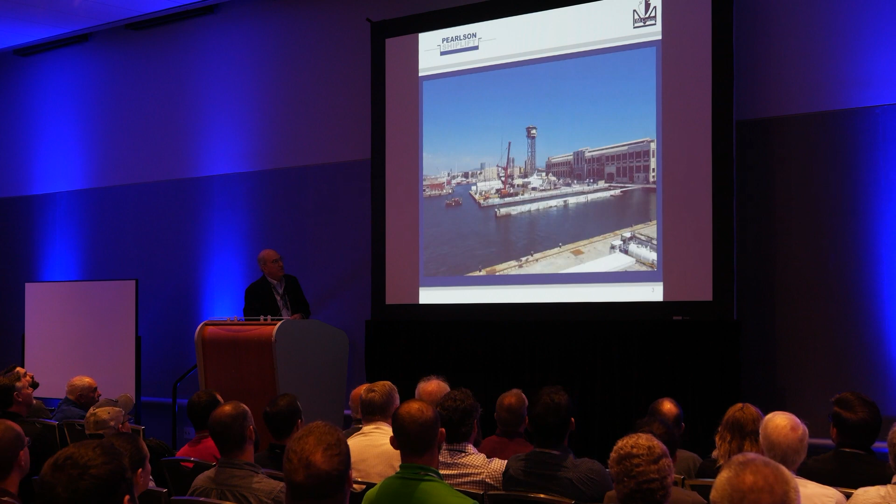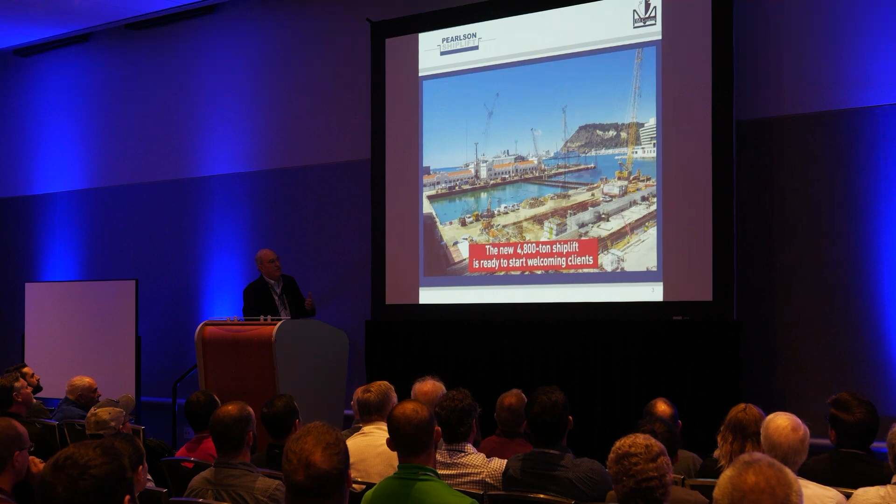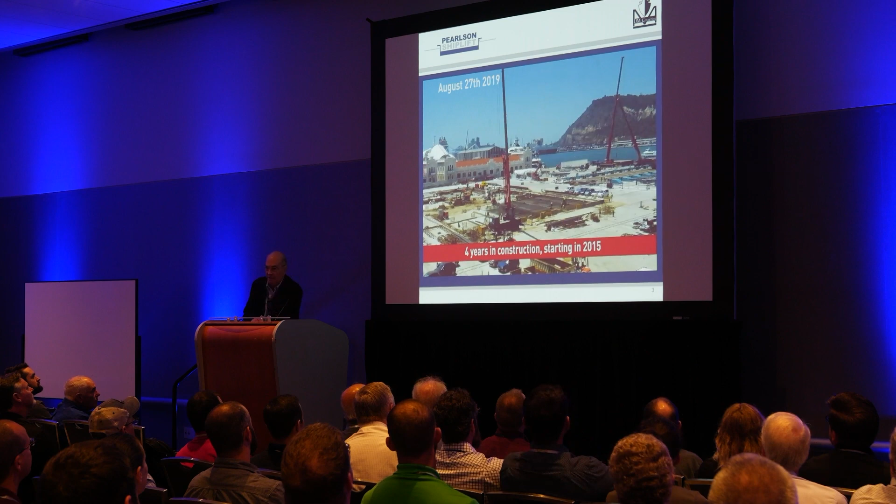Good. This facility took about 4 years to build, which one of the slides will tell you, and it basically was in a reclaimed site that used to house the paint shed at the Barcelona yard. This shipyard has an existing shiplift that was built and maintained, surveyed, and assessed by us, which you'll see in some of these pictures, but all of these images really show the entire process of reclaiming the land, putting in the foundations for the hoists, and then as soon as the shiplift itself was commissioned, putting it in operation even while they completed the construction of the rest of the yard.

Part of the interesting foundation issues here is a lot of what you see is actually on piles above the water. They did not put in a bulkhead and backfill the entire yard, only the back side of it, to transition to the existing yard.

This was during the testing and initial docking process. From a dockmaster's perspective, what you'll notice in the next vessel that comes in is that they allowed the ship's crew to bring the vessel in and tie it off before the docking crew took over.

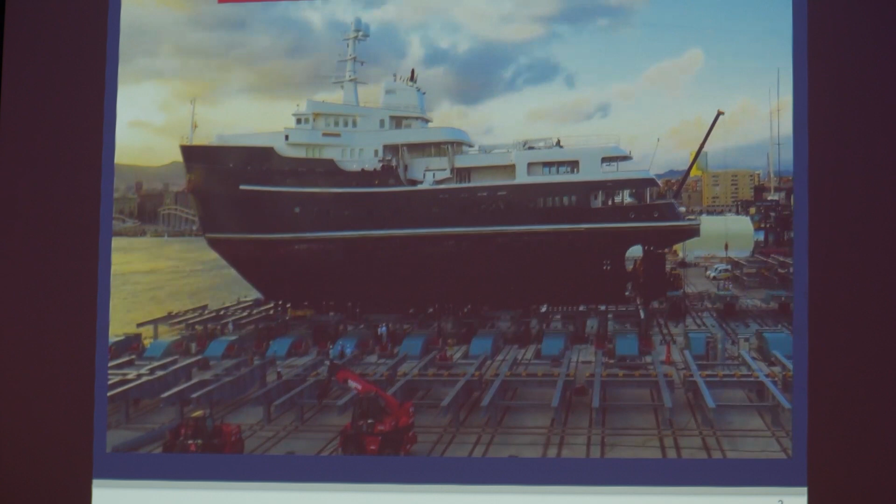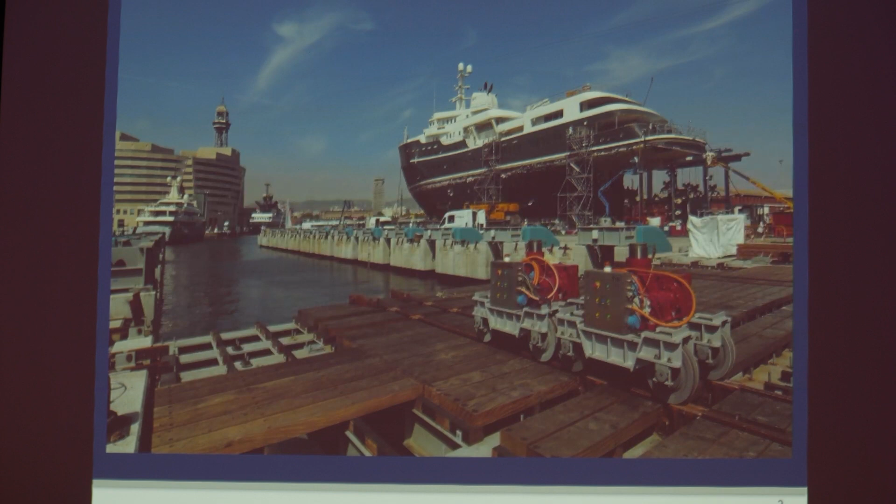That platform is actually moving at about 9 inches a minute vertically, and then once the vessels are transferred ashore, they can be basically placed in a repair berth first. Now watch this, because I've never seen this before, and I was actually at the site that day.

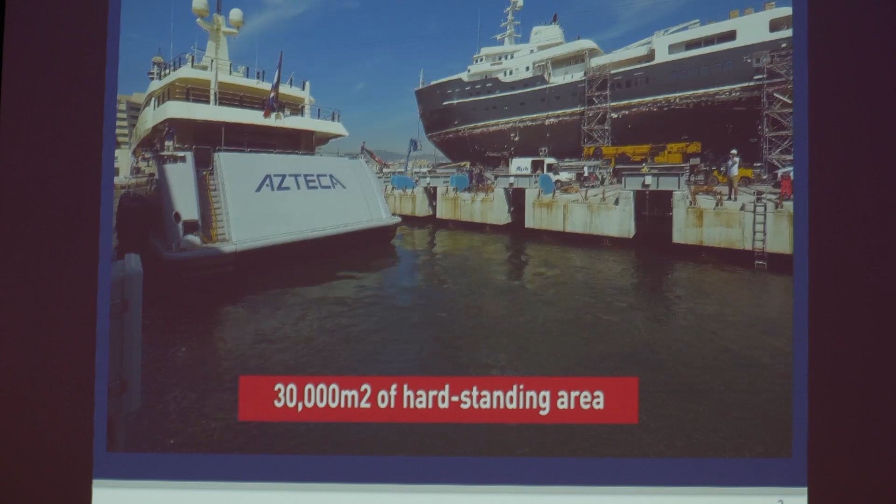The captain basically says, I'm coming back far enough, sort of the cardinal sin of energizing your props to stop before you come into the slip. That would give me heart failure if I was the dockmaster.

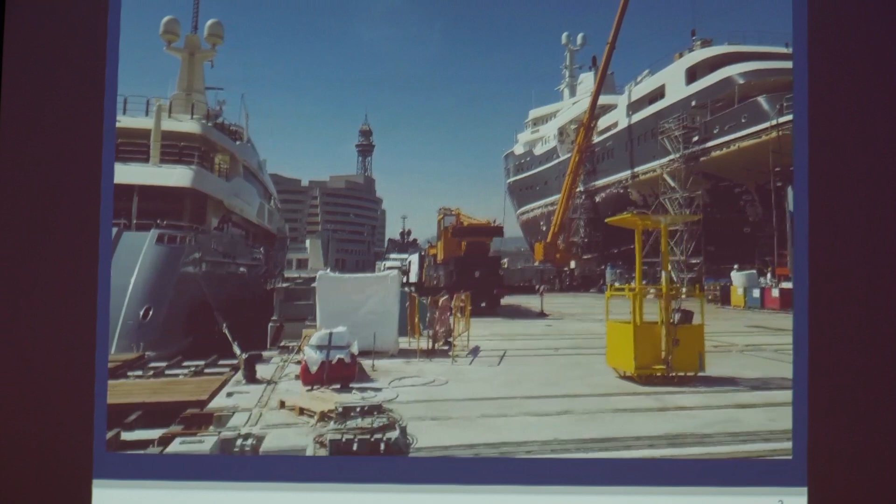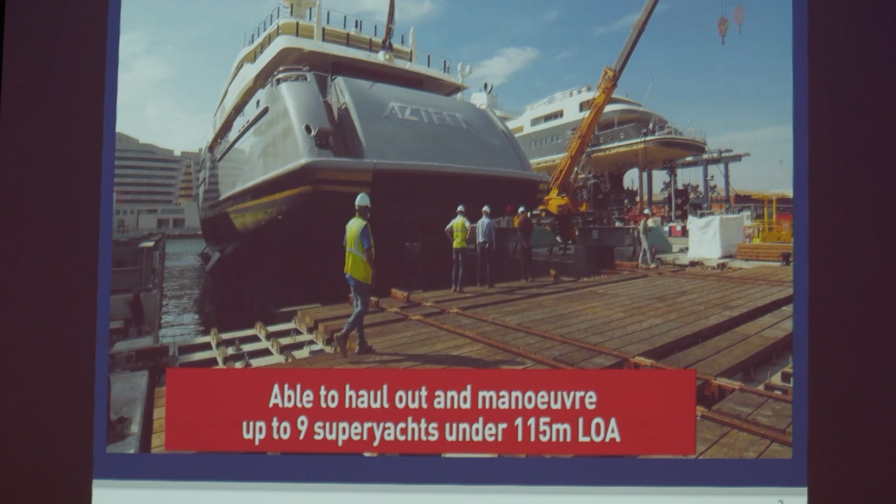What's unusual about this installation is not only does it lift the vessels vertically and launch them, but you can transfer over the top of the hoists. So direct side transfer gives them a lot of space flexibility in where they're going to place vessels and get them back into the water.

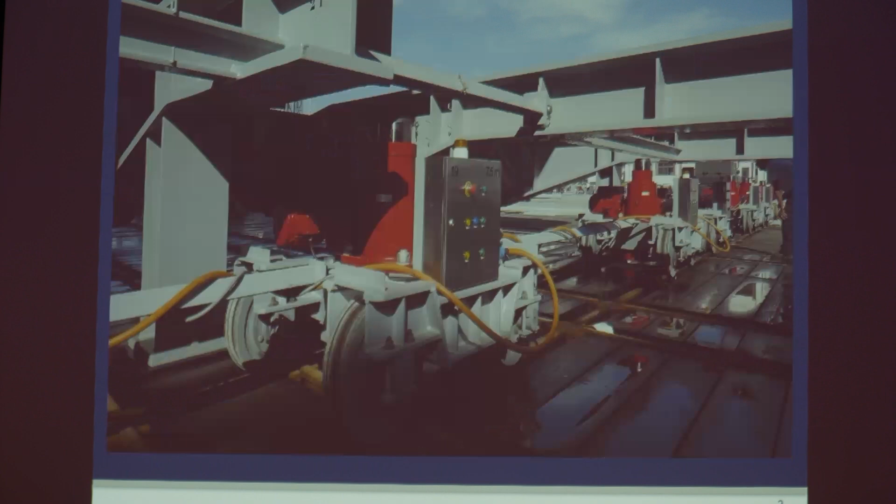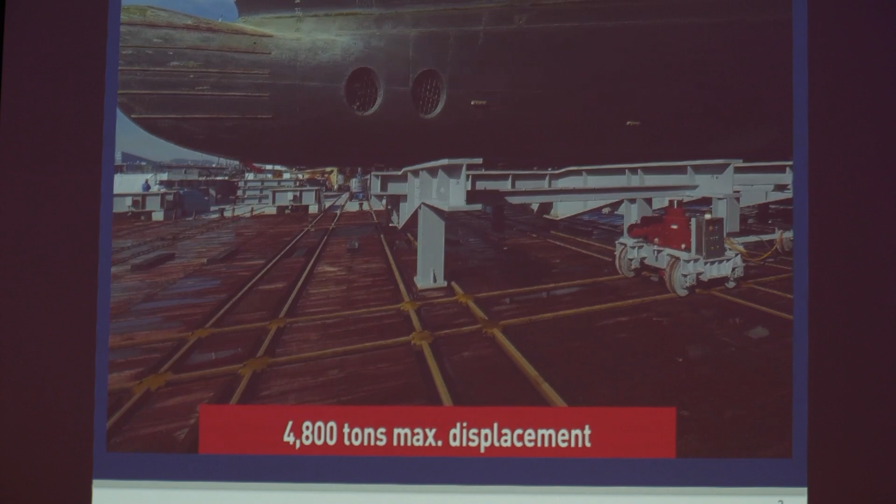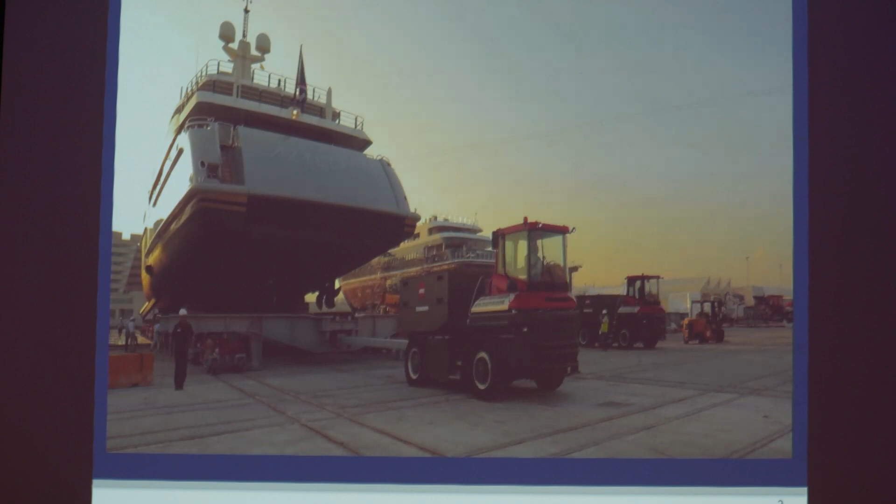The transfer system, which we'll talk about in more detail on the upcoming slides, is an electro-hydraulic jacking system. Each one is 160 metric tons. The strongbacks are pretty conventional, you're used to seeing those in all kinds of different transfer systems. They're brought into the yard on these jacks by what is really just an oversized aircraft mover.

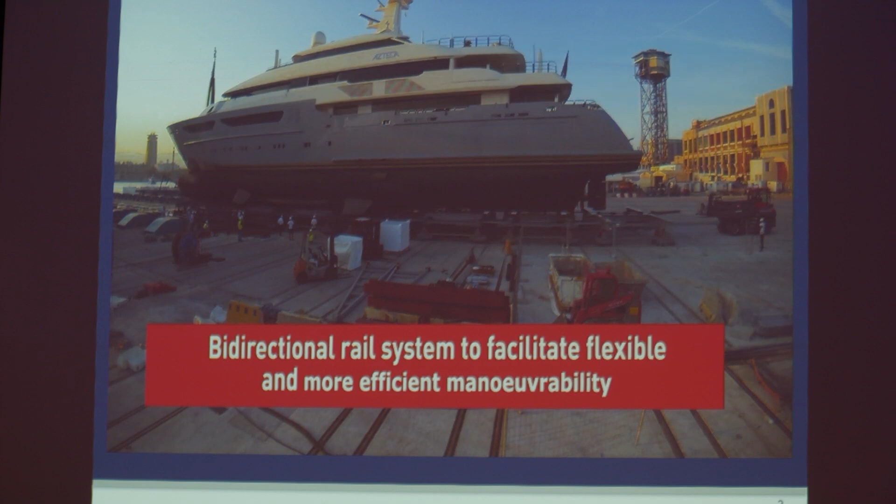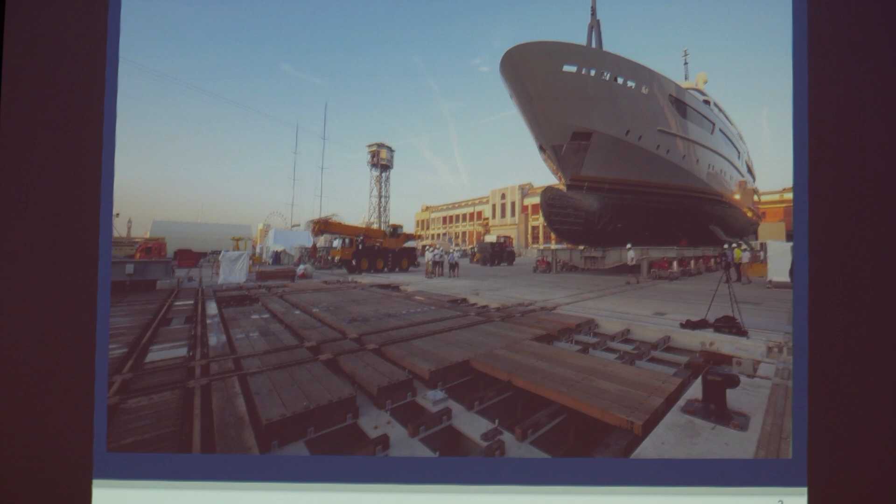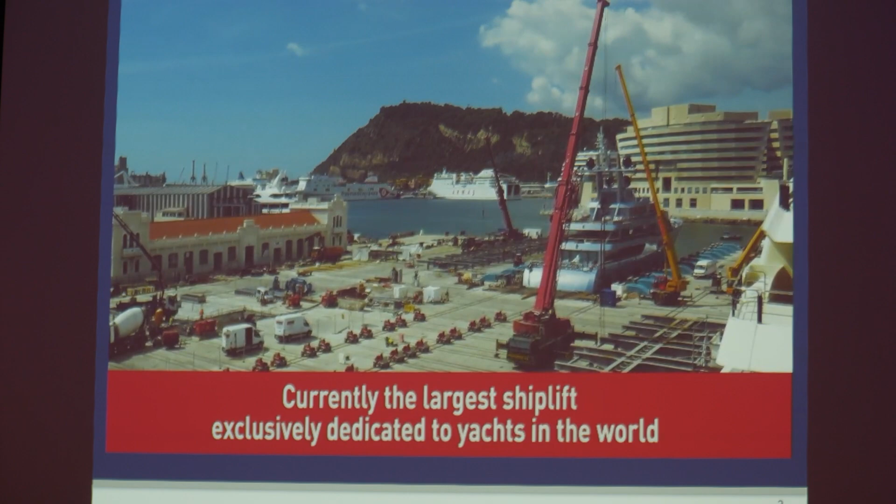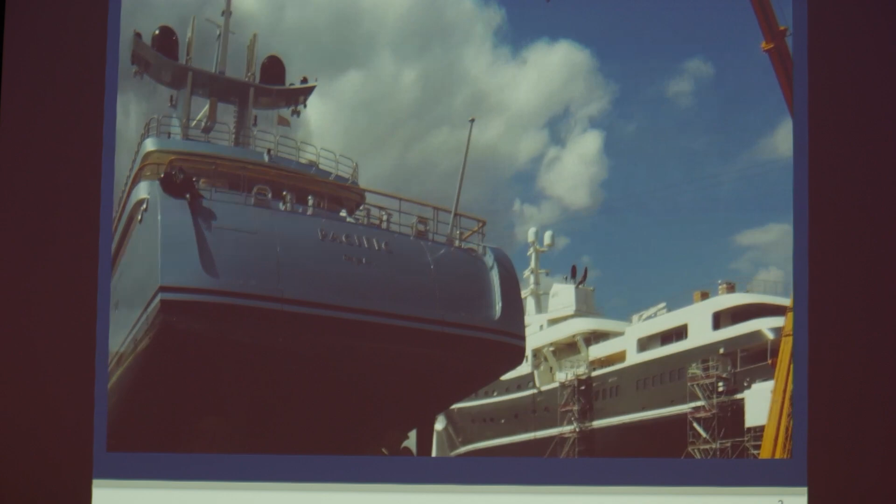This yard was very space constrained, so we were basically instructed to use every square meter to place mega yachts on, as that's their core business. You might see as many as 9 vessels up in the yard, leveraging the investment they made off of the one shiplift with its associated bogie-supported transfer system.

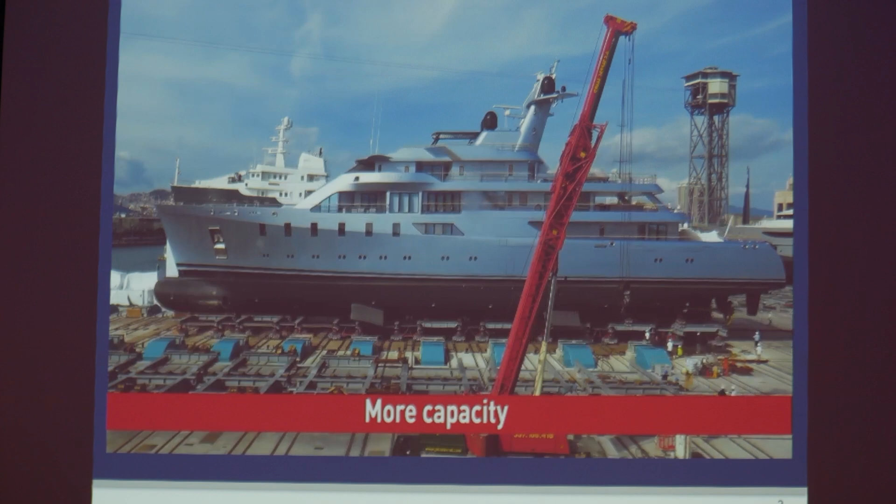On a wheeled transfer system, it usually takes 1.5% of the load being transferred to move it. That's what the drawbar pull would be expected.

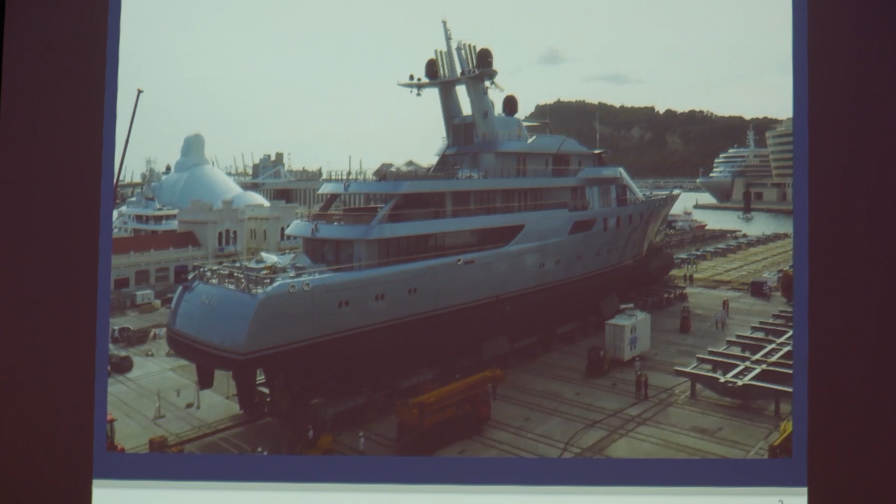So that's where we're going. At the end of this presentation, we'll see some of the elements that were required to actually get to that point in time where you can effectively leverage the capital investment of one dry dock with really as many shore berths as possible. Not photographed today is a lift that we built in Dubai that had 40 repair berths.

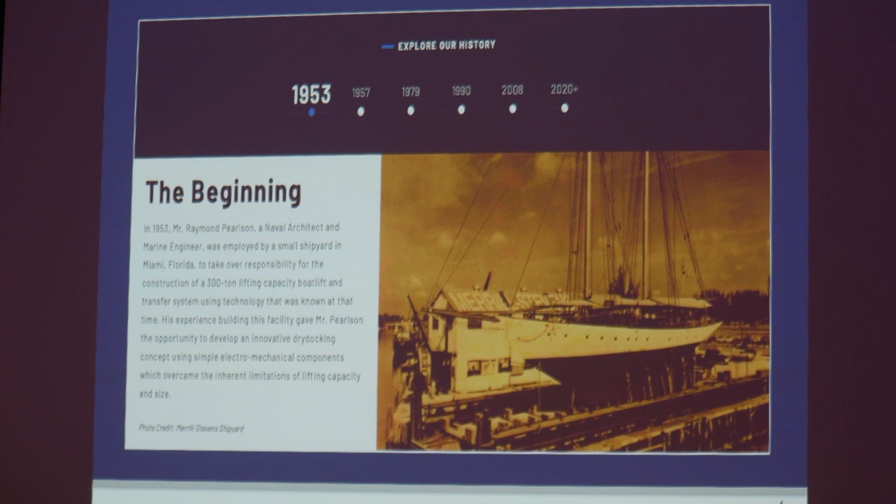We were basically told that the ruler wanted to take care of all of the dhows and all of the more modern craft in one facility, so we put in a shiplift and an onshore transfer system that had 40 berths. They then came and said, well, we have bigger boats now.

So then we put in a second shiplift parallel to the first, much larger, but tied the two transfer systems in together. You just had to remember not to try to launch the vessels docked on the big shiplift on the little shiplift.

My father, who actually invented the modern shiplift, really started out as a young naval architect trying to find a way to feed the family in Miami, and approached a shipyard in Miami and basically said, would you like to build some boats? I can be a naval architect for you.

20-something, 3 kids. The owner said to him, I don't build ships, I repair ships. I don't really need you, but if you want to project manage this new shiplift that we're building, I've got most of the designs done, not all of them. Can you take command of the design and actually complete the project and build this lift?

20-something, 3 kids, no job. Certainly, sir, I can do anything. So he took the job in Miami, and he built this lift, which is at the Merrill Stevens Yard on the Miami River.

This lift was actually dedicated about 1953, and it was built on the principle of a rigid platform with 13 cables of different lengths being supported and pulled up by 2 drums and a worm gear gearbox and a prime mover under the ground. It had 1 transfer berth ashore.

Just for reference, it took till '63, even though it was really invented back in '58, '57, for the patents to be awarded. And there are some subsequent patents we'll talk about in a minute that actually add flotation to the shiplift platform for the purpose of offsetting the weight of the platform itself.

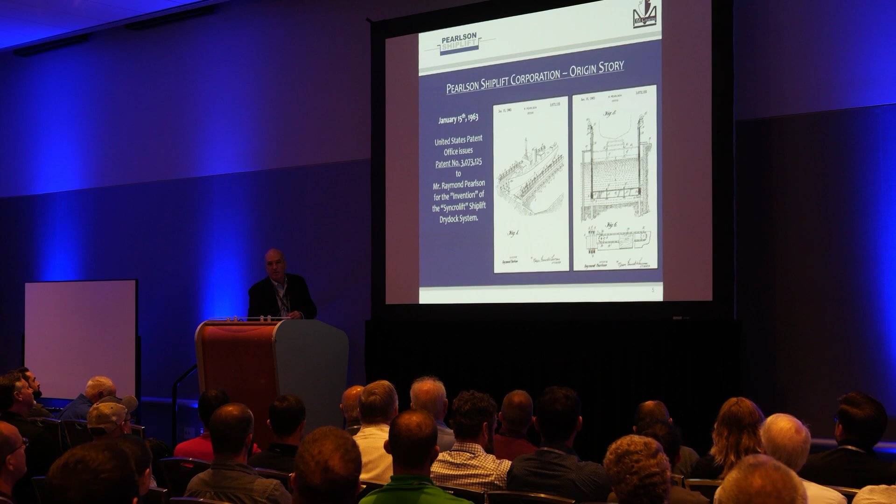So you can picture when you have a very wide shiplift, you're spending a whole lot of energy lifting the platform steel, the girders that go between the hoists. Well, if you can put flotation on the platform, not more than the weight of the platform itself, you can basically offset that dead weight and use the hoist only to lift the ship. So now you can grow the width of these platforms significantly without the burden of having to lift 20-25% of the capacity of the hoists, which would effectively be the weight of the platform.

So again, this is the first lift at Bertram's Yard up the river. And it has since been removed, and they have condominiums or something going into that site, as we see so many maritime sites being gentrified and turned into housing opportunities, which has been a real problem in Miami, as it has been in other port cities.

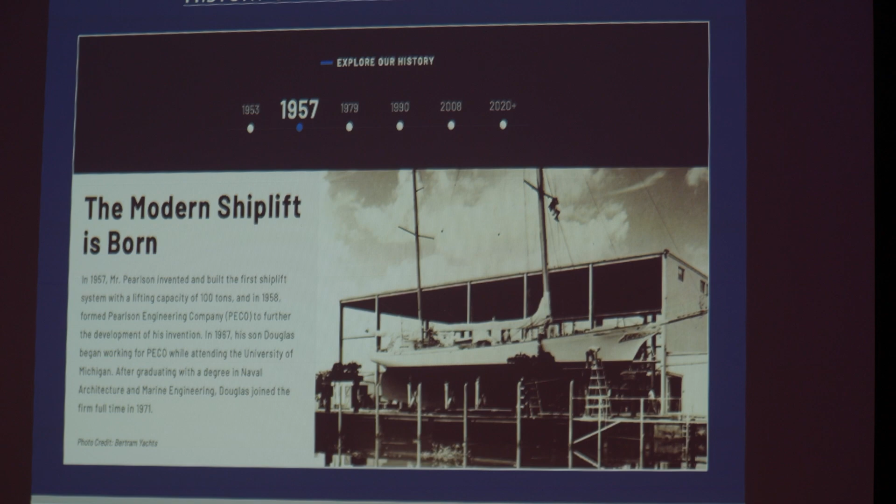So that brings us up to today, or Pearson Shiplift. This slide, which you can download, really covers part of the journey of how I got from president of Pearson Engineering, president of Syncrolift, to the founder of Pearson Shiplift.

In the middle, we basically started building a couple of facilities for nuclear submarines in the UK. To do that, we got acquired by a UK company called Northern Engineering Industries. And they asked me to join their board and maintain my position as president of Pearson Engineering.

So during that part of the journey, we continued to build shiplift systems under the brand of NEI Syncrolift. And then about 10 years later, NEI was gobbled up by Rolls-Royce as part of their acquisition of energy assets, facilities, because they had a number of companies in their group that were of interest to Rolls-Royce. The shiplift system wasn't.

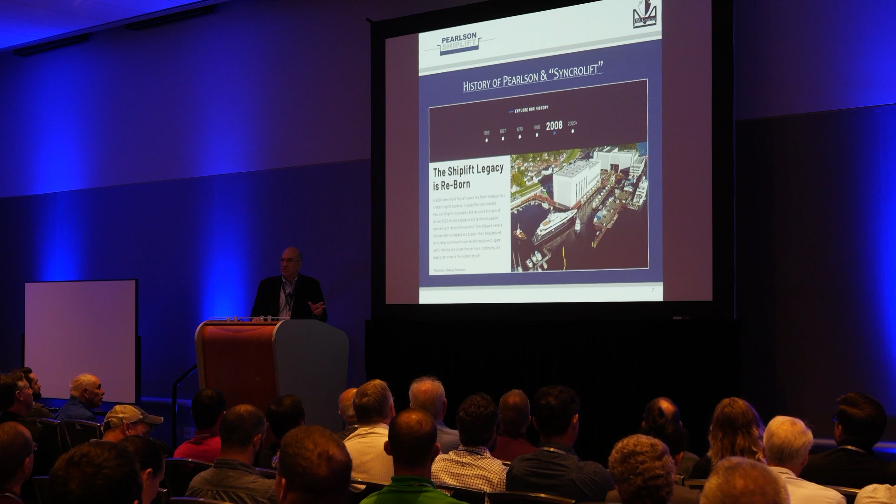Basically I went out and started consulting in building shipyards under the brand Pearlson and Pearlson, and we're still doing that today as an associated firm that actually goes in way before a dry dock is chosen and assesses what needs to be used as a dry dock, how should the yard be developed, what are the sizes and capacities of the vessels, and so on.

So I started getting calls from our customers that asked if we could come in and basically service, maintain, or expand their existing facilities. So out of that opportunity became the catalyst for forming Pearlson Shiplift Corporation, and we built the first lift, which you'll see on our website, in Germany, when actually we extended a lift that I built in the 70s by adding a pair of hoists, and then a couple of years later adding another pair of hoists, because they started building yachts that were too big for their lift.

So we were given a relatively short fuse, and during that time period we manufactured new hoists, installed them, commissioned them, and so on. The Syncrolift, the shiplift, is a tool that's a solution to how do I get that ship safely out of the water. Nobody wants to buy a dry dock, they don't want to buy a shiplift. They want to effectively move a vessel from the water to the shipyard, either to repair it, or if they're building one, launch it safely. That's the mission.

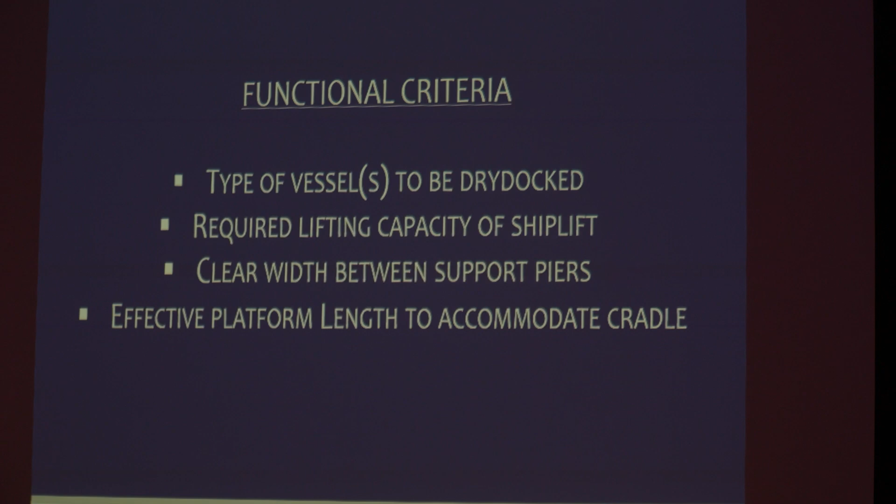This list I won't spend a lot of time on because it's common sense - what do you need to assess? The most important thing is really the width, whether it's between the wing walls, between the walls of a graving dock. What is the maximum beam that you can handle?

The shiplift, which is an articulated structure, is modular. So you can add sections as you need to lengthen it. If you want to increase its capacity, you can put hoists in between other hoists. If you want to do a combination of the two and make it wider, you can put an auxiliary pier in, get that built, and then move one set of hoists over and put in a wider platform in the middle. It's much more complicated, but a number of you in this room may have experienced that. Again, it's a very flexible asset that lets you expand it as your requirements come in.

So what has really transformed this entire process of dry docking with shiplift systems, as opposed to conventional dry docks, is this upland opportunity - what waterfront is available, what upland is available. And at the end of the day, how am I going to get onto the shiplift platform? If possible you always want to come in the end of the platform - it gives you lots of flexibility, significantly lower costs for what you're building. But Barcelona didn't have the space, so you then pay that penalty in cost and complexity, and you transfer the vessel right over the top of the hoist.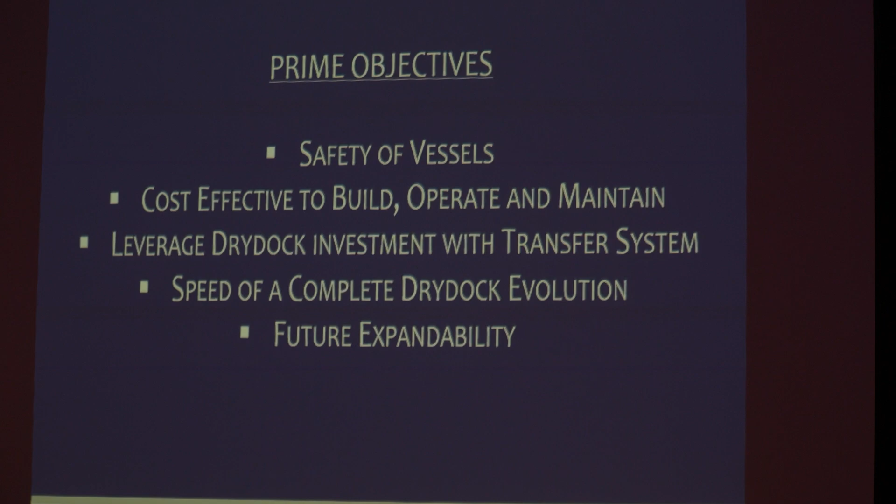So these are two classic facilities that were built in a time when land was available, and you just don't see that today. So you see very few of these two-level transfer systems. Nothing is more effective than a two-level transfer system because you never take the wheels off the cradles and you never take the wheels off the carriage. Less than half a dozen people can move one of those vessels from the dry dock itself.

The ship lift here, and after it's clear and ready for transfer, you hook it up to whatever conventional vehicle is available, bring it over the top of the carriage, transfer it sideways. Usually there's a winch in that pit, and then park it back in its repair berth. They may handle 400 to 450 vessels a year at that installation in Las Palmas.

This installation shows basically the existing installation that has a two-level transfer system in Barcelona. So the new facility is basically on the other side of the yard out of this picture, you'll see it in a minute. But here again is the ship lift, the transfer carriage, move it sideways and park it into its repair berths.

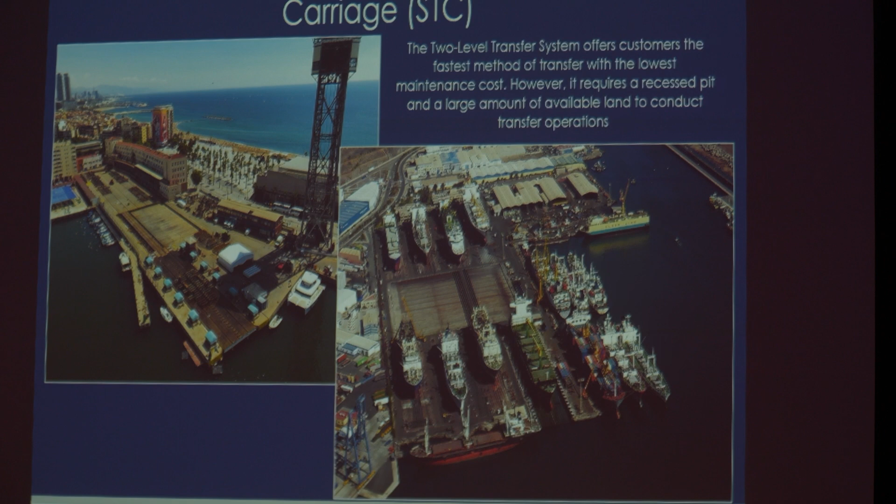Some details of the side transfer carriage where you can see you've got the rails on top of a wheeled carriage that moves perpendicular usually, but not always. Sometimes it rotates, sometimes it moves at an angle, depends what the land area is.

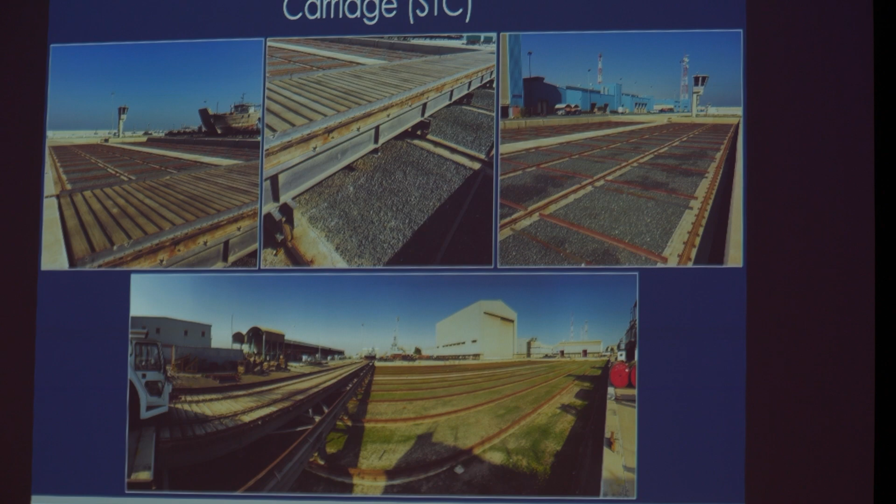All right, single level transfer systems. This is an installation in, let's see, that's Savannah, Georgia. And basically, they had an existing dry dock facility that was in a building. It was a Crandall Railway.

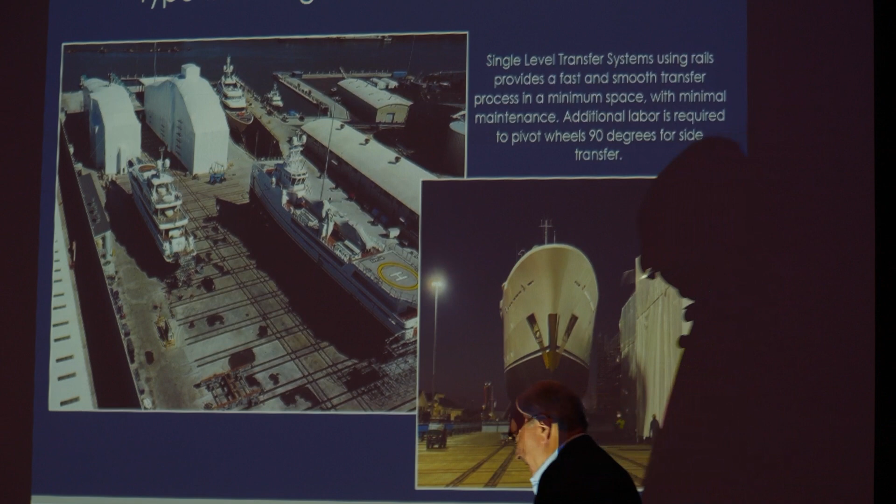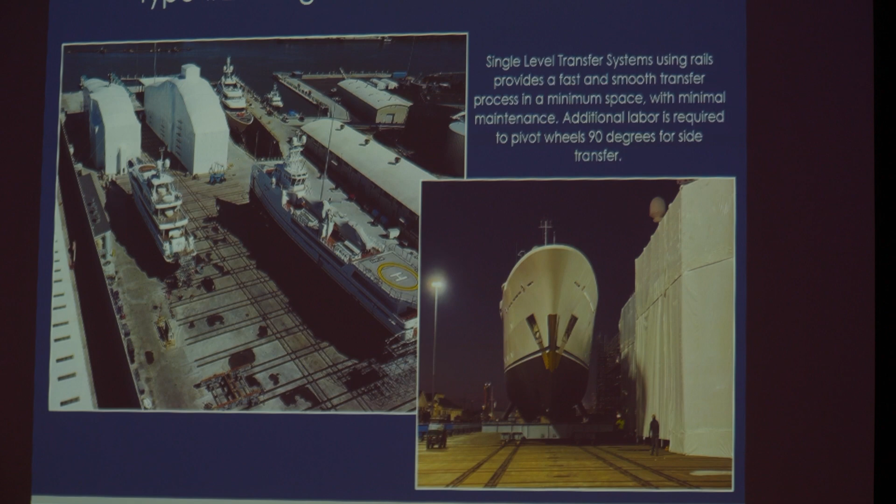Now, this is a little unusual because you see in the strongback itself, it basically goes all the way down the line of the ship lift itself, and then the wheels are actually turned in the cradles. So again, there are many different types of transfer systems and solutions depending on what you want to accomplish. In this one, they had side transfer, but at the end of the day, they did not want to go through the expense of hydraulics or lifting these bogies, so they put wheels on all of the cradles and move them sideways, and then they turn the wheels 90 degrees and move them across into their repair position.

Similar facility, and it's actually almost an identical ship lift. A minute ago, I talked about the first Merrill Stevens lift. It operated for 63 years, lifting yachts until the owners decided to make an investment, and they built this facility, which basically handles 13.75 tons per foot. And the vessels, it's 90 degrees from the original orientation of the first ship lift. But that's how that land area had to be developed on the river.

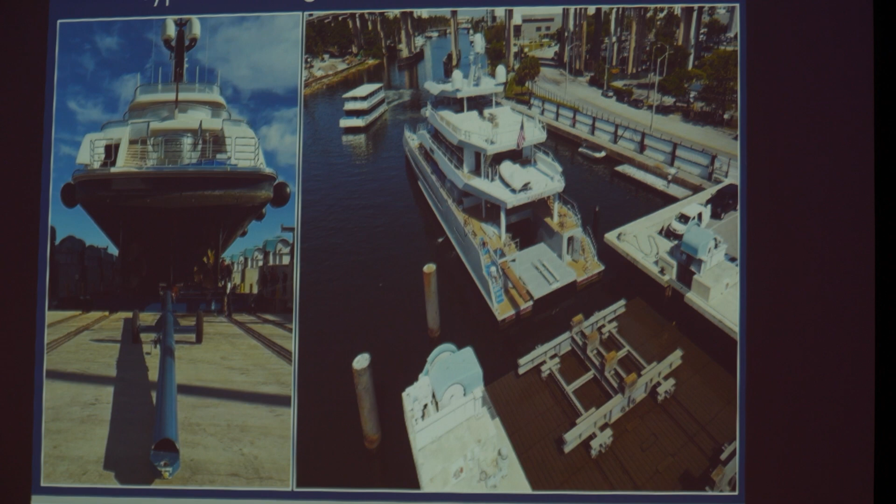It's an end transfer lift. It uses the same kind of transfer car as Savannah. And the bilge blocks can be slid laterally and longitudinally to place them wherever the vessel's docking plan would require. The tow bar obviously reaches up underneath the vessel and connects to the first cradle in line, so it can be pulled on or off the platform without having to put the vehicle on the platform itself.

This one's in Gulfport, Mississippi. Basically, they had the requirement to build and launch mega yachts for many years at Trinity.

They use SPMTs, probably the greatest contribution to the flexibility of moving ships and blocks and production in shipyards for the last 50 years. So the SPMTs can be configured in different combinations of axle line capacities, of width. They can be bolted together. I would assume most of you in this room are very familiar with the flexibility an SPMT brings to you. And because it has a trailing wheel hydraulic suspension, it's like a caterpillar going over a washboard road. The deck stays level, but the feet basically climb up over the bumps. So you get a lot of flexibility using that tool.

It also lets you build your cradles as strongbacks with wings on them that let you drive the SPMT underneath it, so you only need one set, which most people actually lease or rent if they're in new construction because they don't need them around the yard the whole time, or they supplement what they do own.

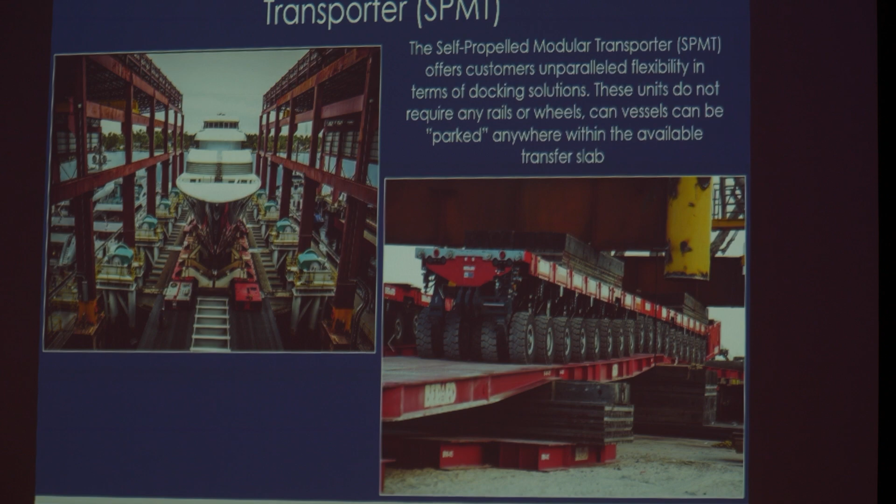Another view of the same thing. This gives a good picture of the actual strongback itself. You need enough clearance to be able to get the collapsed strongback underneath, and then you lift it up.

After it's been lifted up clear, you drive it off the platform, and you can basically use bilge block supports with hydraulic arms. You can use sliding conventional blocks, or you can use fixed blocks.

This is a platform on which you do your block build, and you do your block build horizontally in the yard. You assess it, you survey it, you make sure it meets the requirements of the docking plan, and those elements are not even on the docking plan, which is more the case than not. Then you can use those supports during the evolution.

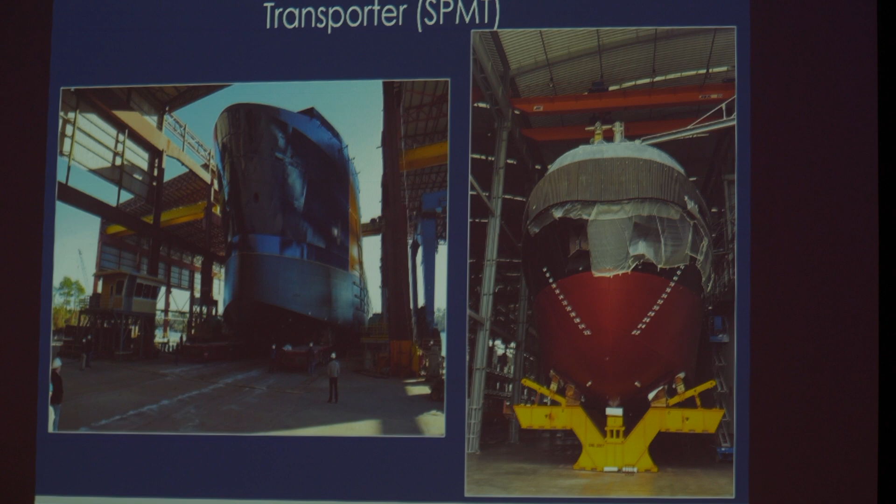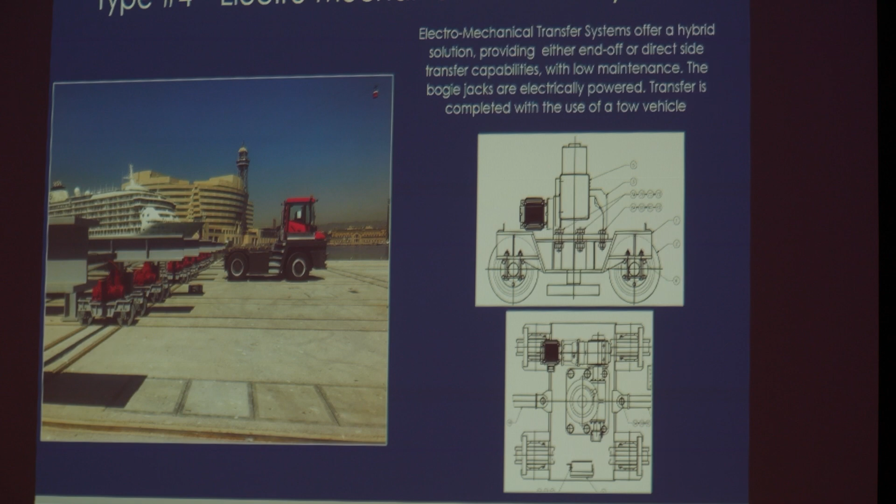Again, the configuration of the strongbacks varies with the type of vessel's displacement and the number of lines of SPMTs that you need. There may be two for smaller vessels. I've actually seen a lift with one down the middle for very, very small vessels, and as many as five strongback lines going down on the platform. So the strongback is more complex.

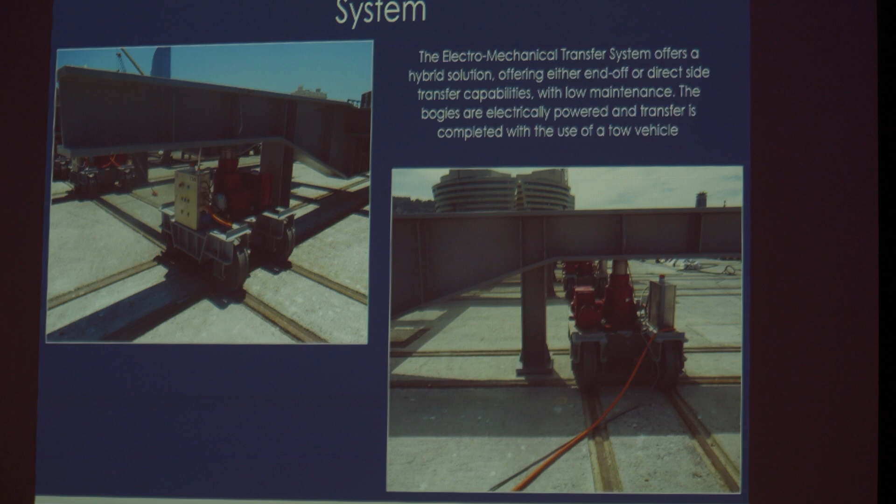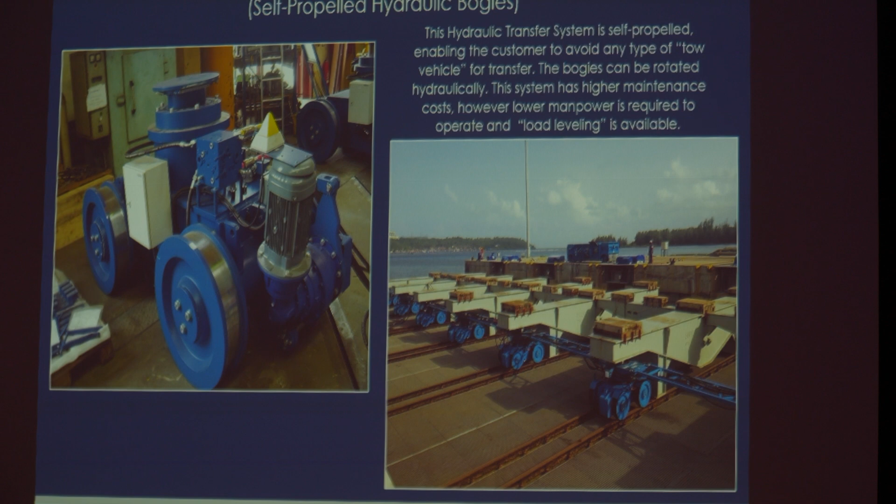Part of the challenge we're always given when we design a new yard is where are we going to put the empty cradles? I try to explain the cradles are not going to be empty very often - they're going to have a vessel there making money. But if you do have that problem, you can stack them, so that everything is modular for the practical application of space, because today's shipyards are very constrained.

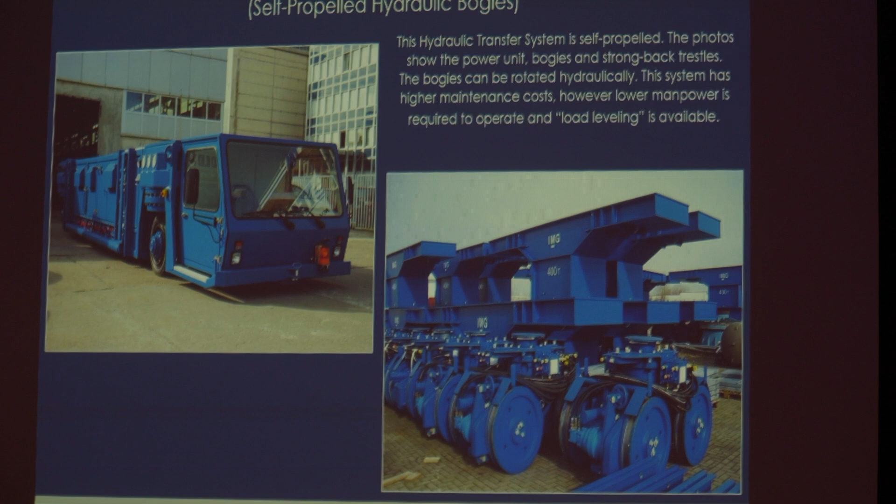What follows is basically a series of different types of installations. Remember, a minute ago I talked about end transfer. End transfer gives you the flexibility of elevating the hoists sufficient to pull the platform out of the water when it's not being used. So unlike a floating dock, where you have to dock the sections or bring it to a graving dock for maintenance, with a shiplift system you elevate the hoist such that you can bring the platform above high water when it's not being used.

That's a maintenance elevation, and you lower it down where most of the platform's in the water for transfer. So end transfer gives you the flexibility of doing that. Direct side transfer, you have to recess the hoist because you're going over the top of them, so maintenance becomes a bigger project. So this is the ideal configuration off the end.

This installation is currently under construction, and we expect next year for it to be commissioned and launch that first FFG. Actually, there'll be a vessel launch before the FFG goes in the water, but it'll use the same platform and the same type of cradle systems and SPMTs.

For those of you that have been to the Marinette site, you'll realize why when I go through the door, everybody frowns, because launching is no longer an exciting adventure. I try to explain to them that our job is to make the dockmaster, shall we say, not quite bored, but a little less stressed. So therefore, we have a very long and quiet launching.

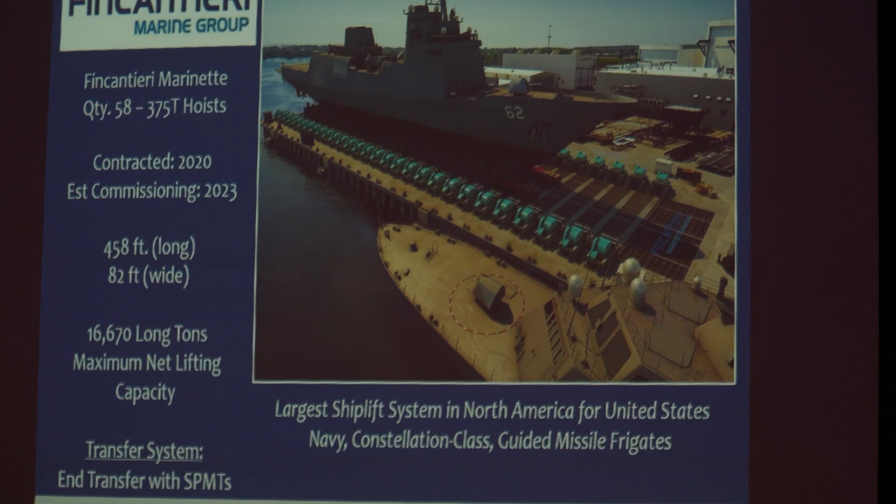So again, I'll give you some more details on that in just a minute. All right, so this one we talked about earlier is Barcelona. The characteristics of this are fundamentally the same, except the hoists are recessed partially so that you can transfer over the top of them if you want to fill those two berths.

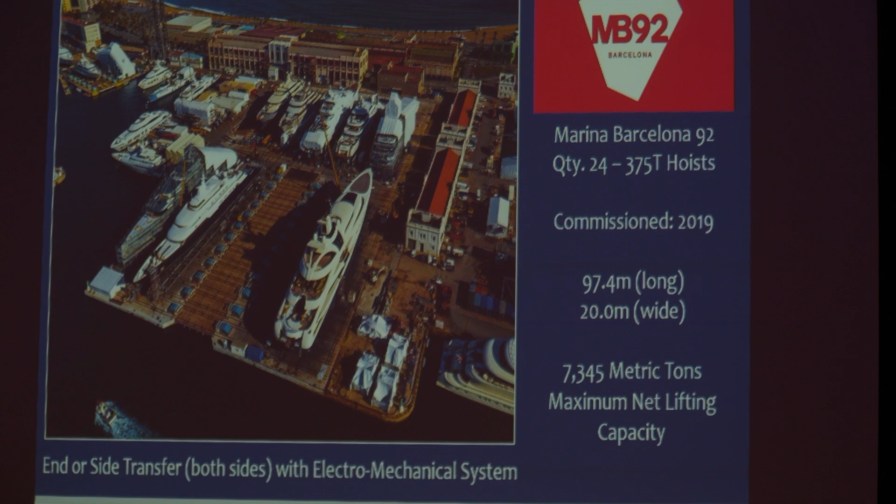Then in the background, you can now see - there we go - that's the original lift they had operating, from the other vantage point taken here, and this is the new lift. Their transfer systems are not connected; they're totally different. But it's such a cost-effective asset that it basically became a question of how big should we make the new lift, how wide should we make it, and so on.

Again, Savannah - we saw earlier in one of the slides - they had an existing Crandall Railway and a very long construction hall on the site. We converted that with a land level facility that was built over the existing foundations, added new foundations, and put the ship lift out at the end where the railway was - actually, it's off to the side of where the railway was.

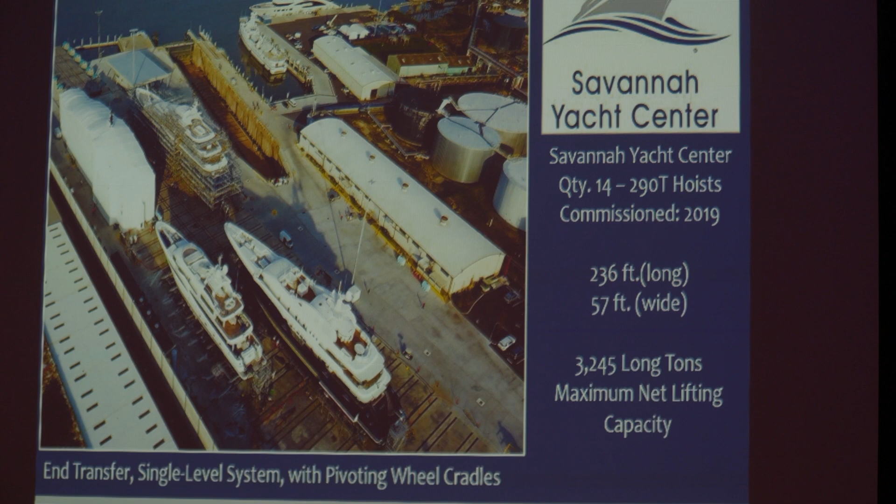That first lift in Merrill Stevens, where the stern of these vessels are in the front - let's see, went back over - where the stern is here is where the axis of the original Pearlson ship lift was before we decommissioned it. So we started construction of the new site, and it became a point where, since we were upland, we had to decommission the original lift and then continue the construction on shore while they finished commissioning the new lift.

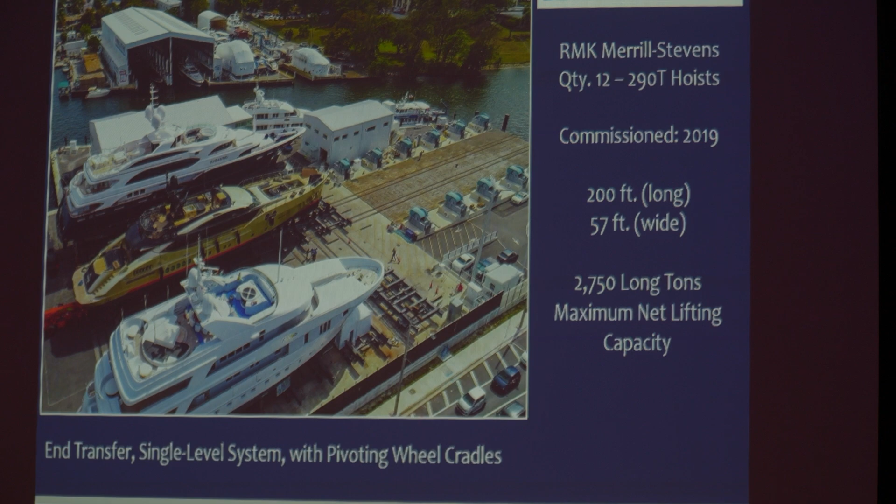This is a noteworthy installation in Japan where the Fukushima disaster occurred - the tsunami came in and destroyed this particular town in northern Japan. So we were approached to build a new ship lift to handle the vessels. This is one of the busiest fishing facilities in Japan. And what you see in front of you is...

...the tsunami wall that's built. So the whole yard is behind a tsunami wall, and the hoists are elevated. So in the event of another disaster, they can raise that wall, and they can basically hopefully save the rest of the facility upland from that.

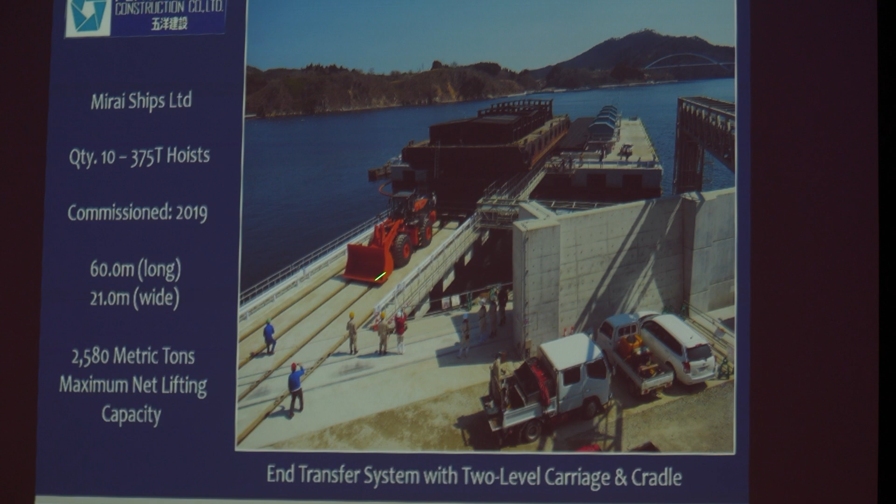This is a good picture showing a conventional vehicle that is available to transfer the vessel. What's unique here is it's an end transfer carriage that's recessed, and in the yard you have a side transfer cradle, the reverse of the typical lift. So the cradles all have the wheels oriented 90 degrees to the lift, and on the lift is the bottom element, the carriage. So it's double decked here.

This is a GRP deck instead of wood or a bridge grating type of facility. So again, there are a lot of solutions depending on what's needed for a particular site.

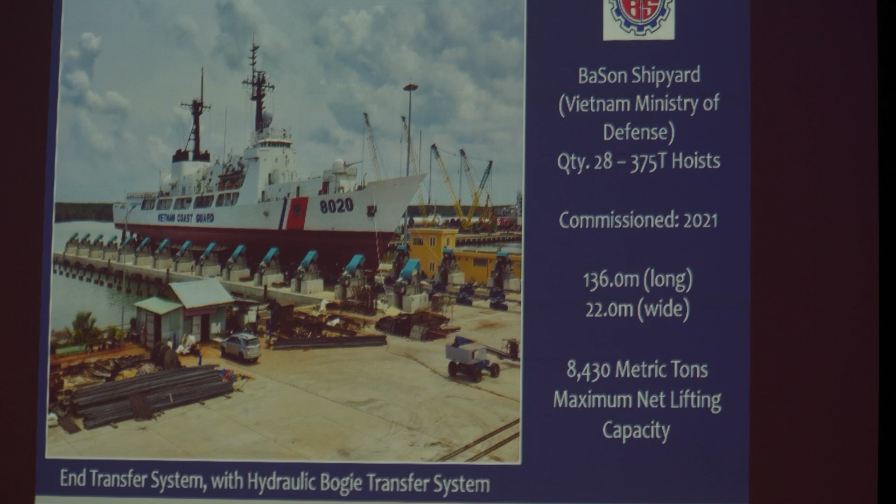Vietnam, again, another application of an end transfer lift. Hoist covers are raised, probably for the annual survey. Our team goes out and does a site assessment, survey, inspection, and training annually to keep these lifts certified, and then obviously training and maintenance as required.

Again, another picture of the Vietnam lift, and you can see the strongbacks, the blocks, and here they docked two vessels, one behind the other. You've all been challenged with double docking at different drafts or whatever you have to do if it's in a conventional dry dock, but this is pretty straightforward.

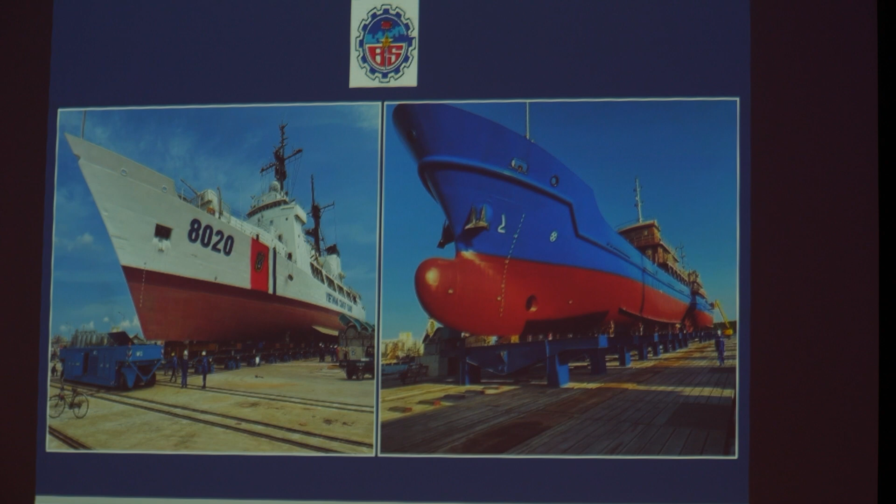We recently built this one in Qatar. Basically, their challenge was a little different. They had a very long, I don't know if it's miles long, but certainly an exceptionally long development upland of different docking, shipyard facilities, ship repair facilities, marine-related facilities, one ship lift.

So we transfer the vessels over the top of this platform on the side on a series of shuttle bogies, and we then take the strongbacks and wait for the SPMTs to drive in, pick up the vessel in the cradle and drive it into wherever they're going, half a mile away, and then come back and get the next cradle for the next operator. So it's really a shared use facility.

Give you an idea of what the other end of that lift looks like. It has a grating deck instead of a wood deck, because again, it's a question of what's the need, what's the cost, how are they going to be using the facility. There was not going to be any work on the platform, so they didn't need a real smooth work area or an effective work area, so they basically just have to stage and position the blocks on the cradles here.

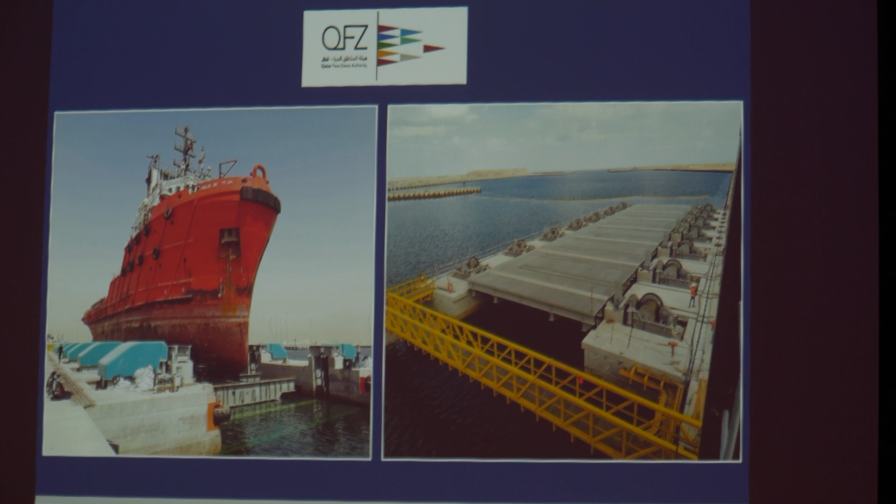New facility recently commissioned in Taiwan.

Again, end transfer off the platform. You'll notice there are no specific rails on that platform even after it's decked, because they have so many different types of cradles upland that they can use different pairs of rails or put rails there for a custom cradle that they're building, using the platform literally as a platform for their transfer system.

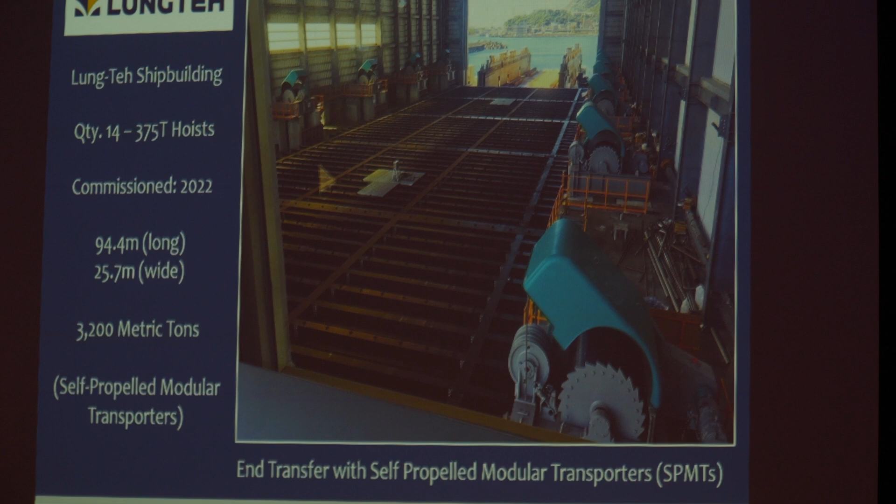So this is a case where the shipyard says, we want to use our transfer system. You accommodate that by giving them a flexible support platform. And the biggest challenge there was getting the hoist inside the building and underneath the walls in whatever space they were kind enough to give us to put in the ship lift. They already had plans for what their construction hall would look like.

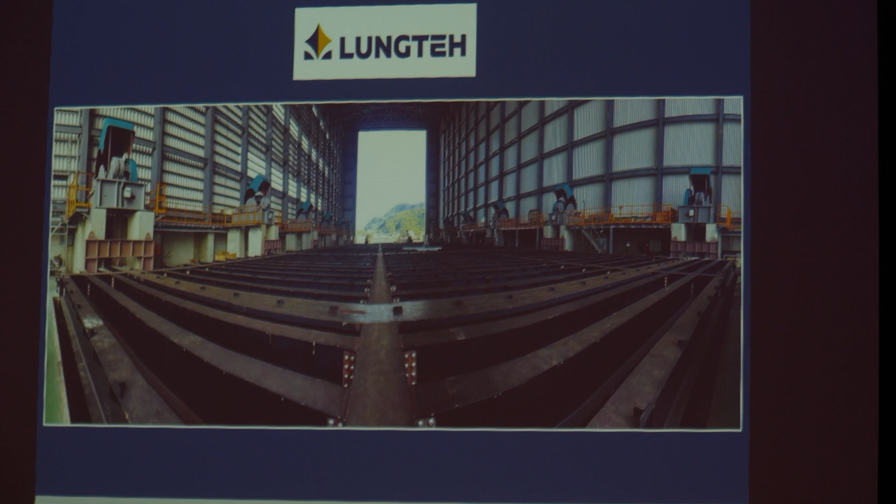These are two notable installations. The first one was for ASC back in the day. It was actually Eglo Engineering in Australia, where they were a commercial yard, and then they started building the submarines on this facility here, and then they built the new larger facility that is parallel to it.

Again, they had a wheeled hydraulic transfer system, which we've engineered a replacement for SPMTs, and this is a good example of spending some of your capital in the beginning. You see the space in between these last pair of hoists.

They basically are now building, we are building for them, 4 more hoists, and we're going to be expanding that platform by taking these sections out, bringing them upland, cutting the longitudinals, putting in a main transverse girder, and then taking them back out and reinstalling them in position for a lift that has more capacity down a longer section of the platform.

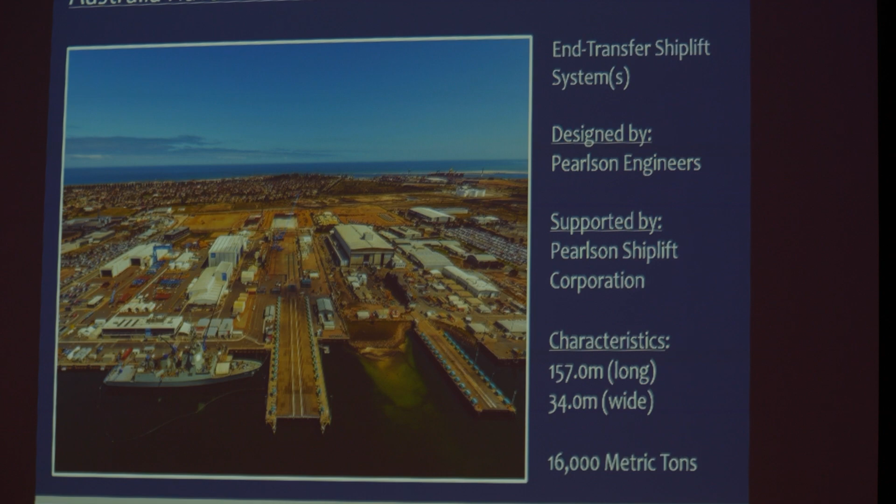So the tons per foot capacity is determined by how close together the hoists are. In some installations, like Halifax Harbor, it's not just how close they are together, but you actually put different capacity hoists in because their requirement was such that they knew the load distribution of their target vessels. And so we have hoists that run all together.

Remember, these are electromechanical hoists. There's only a synchronous motor at the end of each gearbox driving a single layer of rope on a groove drum. So if the motor runs synchronously, the whole thing comes up like a bunch of clocks on the wall. Doesn't matter if the load is zero or full load, it's going to come up at the same speed, because these synchronous reluctance induction motors, when you apply power to them, accelerate to their full operating speed in a very short period of time, and then run at that speed.

They draw more current if there's more load. That gives you lots of opportunities to put safety devices and sensors in the system to make sure you never exceed the full load and that you know what the load is, which we'll see in just a second.

All right, I'm going to go quickly through some of these other lifts we've seen before in Las Palmas. This is the facility in Barrow. Remember I said the hoists are completely recessed below the ground. This is where they build the UK Tridents, and they're taken up to Faslane, where we have another ship lift, where they are basically maintained operationally at the Faslane facility in Gare Loch.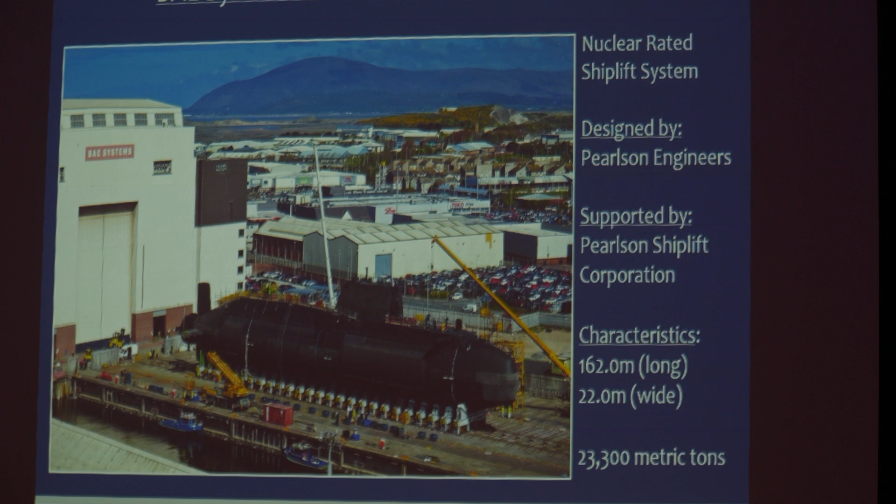Again, when you get really, really heavy loads, this is, I think, a gripper jack system on the front end of the tractor. You assess what drawbar pull you need, then what's the best way to accomplish that in that particular yard. Lots of different solutions in this area.

All right, let me go back and make a comment. This one here was the old Todd San Pedro ship lift. When Todd was decommissioned and the equipment was sold, we were engaged - my engineers who worked for Pearlson Shiplift, wearing the hat of Pearlson Engineers before, the same people who now work with me, basically engineered and designed all of these lifts. So when we sent someone back to the yard, it was probably the guy who originally commissioned the lift, because as long as people want to continue doing this, they have an opportunity with us to do that.

So this particular client said, we want to take all 110 hoists and recommission them in Malaysia, Johor, north of Singapore, but we want to make it wider. So we had to engineer the changes in the girders, basically look after that conversion, and then recommission the new lift.

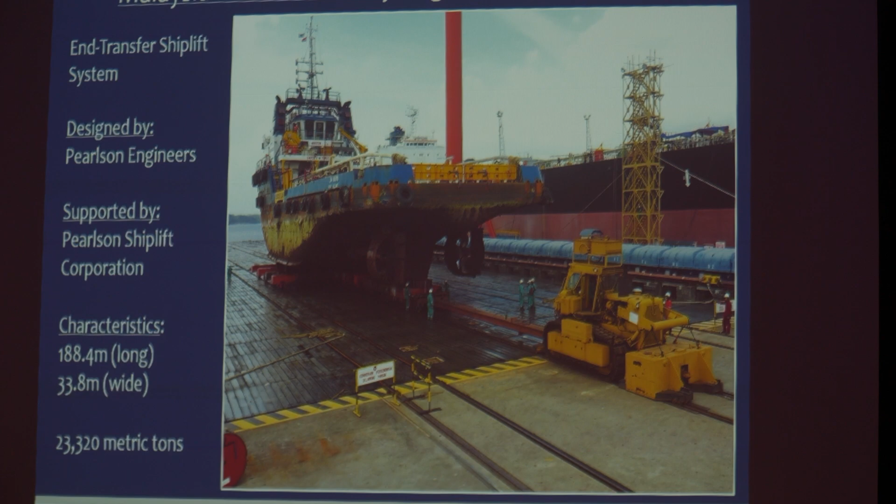All right, so what are the first principles? What are the real engineering fundamentals that are important to mention? Some of which I've talked about up to this point. This first lift that my dad built in 1953 was a rigid platform, 13 cables coming back to turnbuckles, going back to 2 drums at the head wall. So he learned a lot about how we can improve on that concept and make it more flexible.

Now, we can build a rigid platform. There's no trick to that. It just doesn't give the dock masters the same level of information as to what's happening during the evolution, because there's moment transfer between the actual lifting points on a rigid platform.

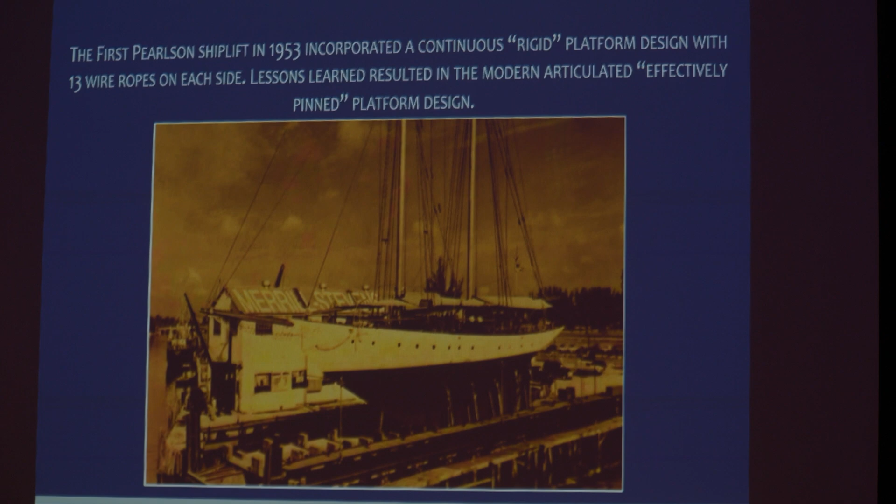You can imagine a conference table where we put a big load in the center and say, let's lift it, everybody. Everybody lifts a piece of it. So if it's overloaded, you may go right through the middle of that table before people realize, oh, maybe I'm at my limit. But if you articulate it like a leaf in a table between each pair of people on either side of it, they only lift their piece. So if you're overloading a block anywhere along that platform, there's no moment transfer.

There's no stiffness built into it, so you know where the overload is. And as you'll see in the control system, at that point, you can say, should I have a load there? And if I should have a load, no problem.

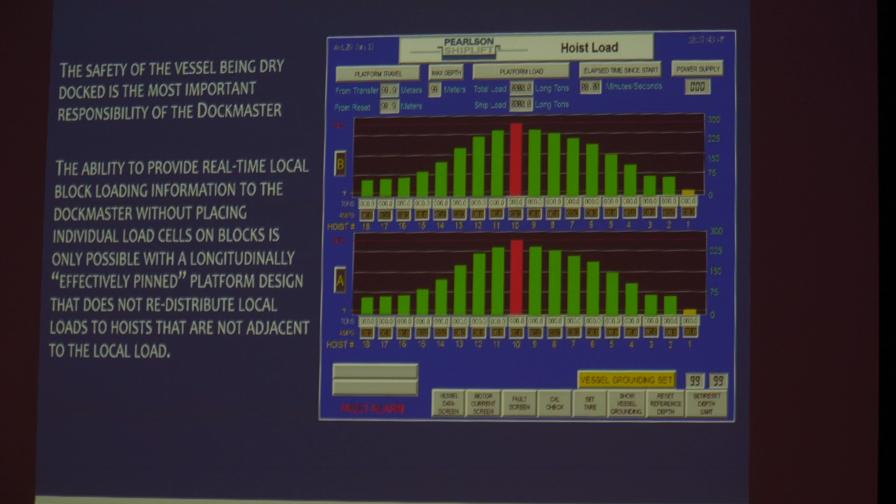So you actually see what's happening, effectively pinning the connection at every one of the hoists. Remember, it's a rigid section of 4 hoists, and you pin the 2.

Now this little sequence shows what happens if you have that keel cooler or a high block or a piece of timber that floats in. You're docking along, and there are 2 of these sequences. The first one is what a conventional docking would look like. As the vessel comes up, you can see where the blocks are. And in this next animation, it shows what happens if on one side of the platform, something floated in and

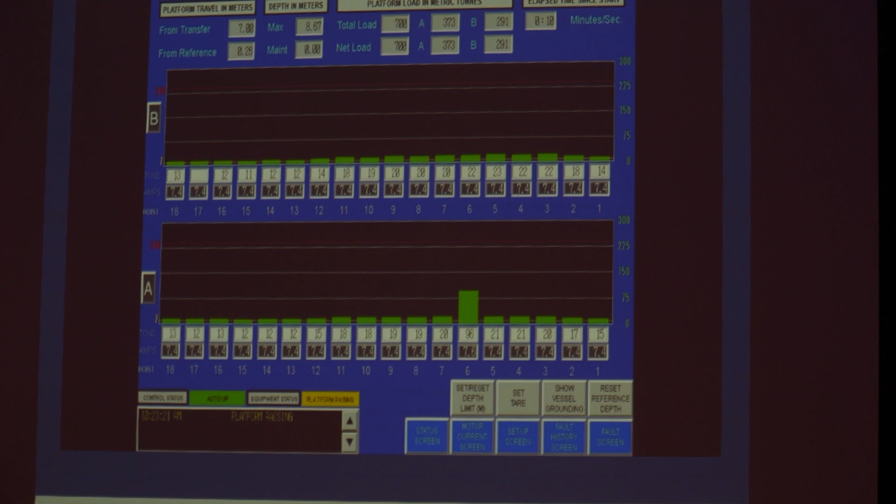got entrapped above a bilge block. So you push the up button, and all of a sudden, one hoist takes off on one side of the platform. So immediately, before you got anywhere near that level, you would stop. If you didn't do anything, it would stop automatically. But as soon as the dockmaster sees why there's an asymmetrical loading in one block, it's because there's locally something happening in the dry dock that you can see. You have eyes through the controls.

Certification, safety, our fundamental focus is on building a facility that can be safely operated from the perspective first of the vessel, then obviously the personnel, then the facility and the systems. But our focus, I'm a naval architect, is to start out with the target, the vessel, and how do we basically design it and build it so that it can be safely maintained.